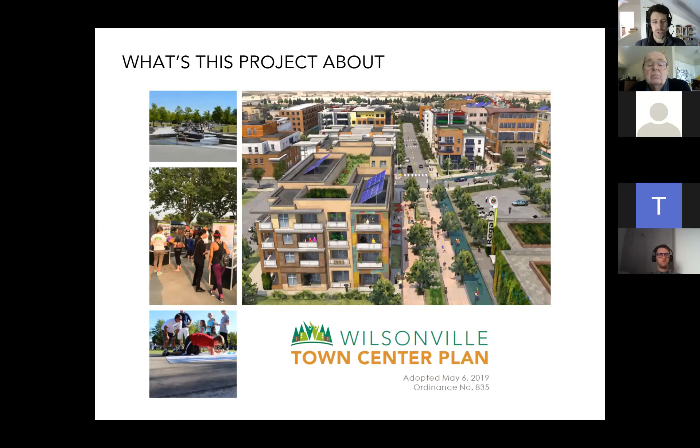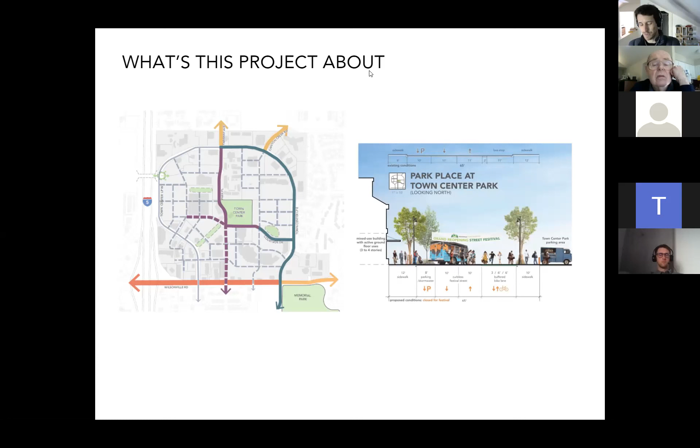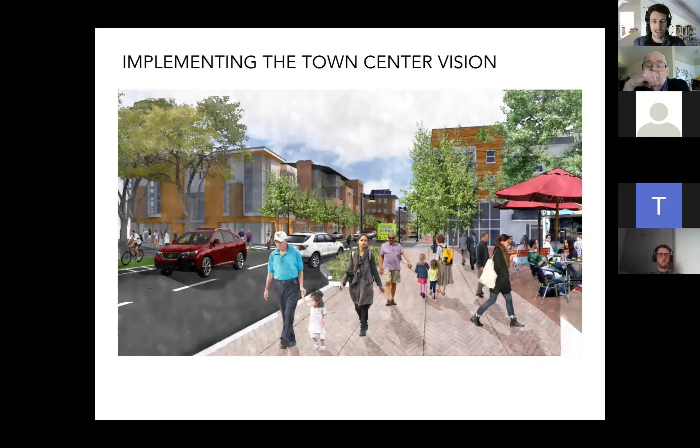This is all with the intention of helping transform town center streets from what they look like today into something that matches this vision, where the streets are more active and safe people places, helping to inspire private development, and really blending between the street space, open spaces, and private site development to create a welcoming, safe, multimodal space with bike lanes and transit for all users.

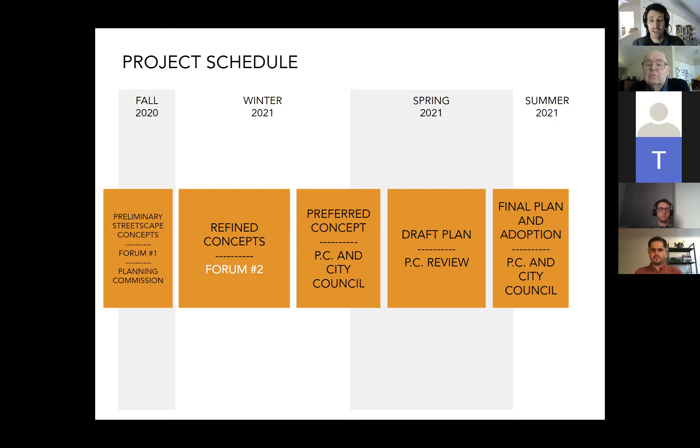Where we are in the process: we kicked this off in roughly October, and had a community forum back in November about project foundations, as well as a planning commission meeting. We're now at the refined concepts stage, so you'll see 3 concepts later on, and we are in forum number 2 right now. Coming out of this, we hope to narrow down to a preferred concept. In early March, we'll go to planning commission to discuss the recommendations for that preferred concept, and probably early April to have a similar conversation with city council. That's to make sure we're essentially getting off on the right foot with the preferred concept, getting confirmation of that, and then transferring into the actual plan writing and specific design work on those 11 locations I mentioned. You'll be able to keep tabs on this project online through Let's Talk and other City of Wilsonville websites and forums in the coming 3 or 4 months.

Just a little bit of that background: again, we're striving to think about streets as places that support vibrant, walkable destinations that inspire people to come together and socialize, shop, live, and work. It's a vision statement from the plan.

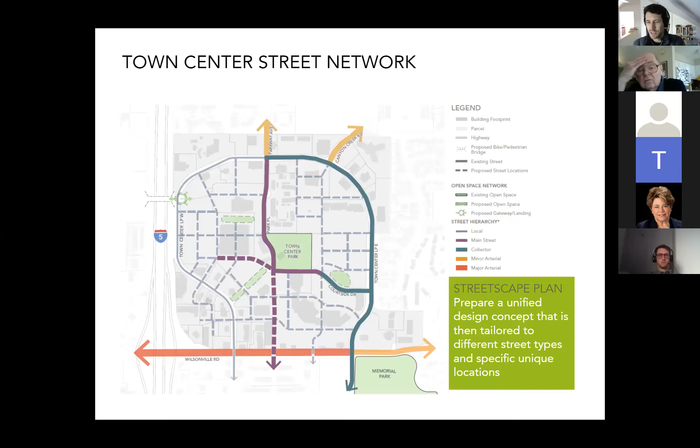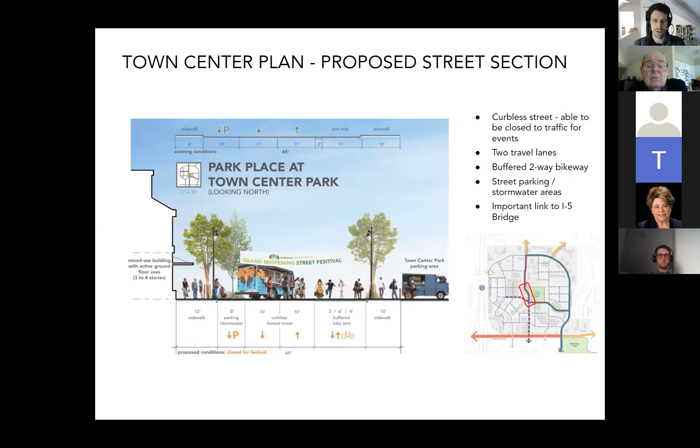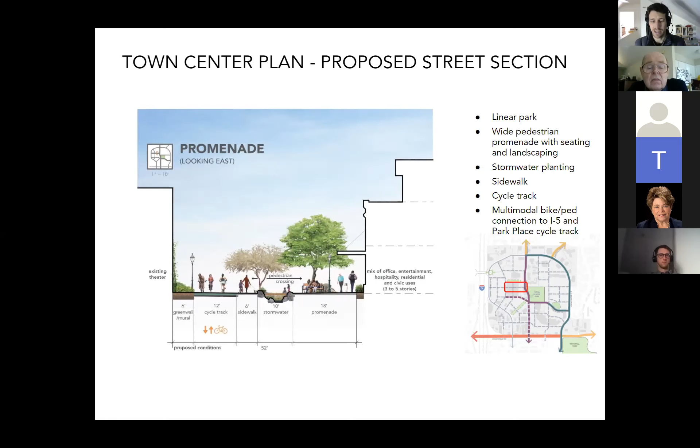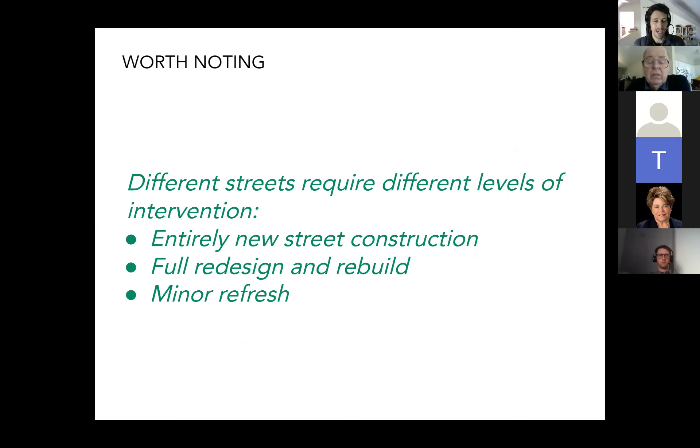Looking again at that streetscape network, we'll blast through that slide real quick. We mentioned that, and these are just examples. You can go find the town center plan and dig into this chapter much more deeply if you want to see it - there's nearly a dozen concept designs in that plan we're taking inspiration from and that we'll take a step further. That's some background homework you can do over the coming couple weeks if we get snowed in. This is just to show the versatility and range of different street concepts out there. We have this curbless festival street, and we have non-vehicle promenades entirely, where in this case a parking lot drive aisle is transformed into a natural promenade with a cycle track and abundant landscaping. The different streets throughout the town center will require very different levels of intervention - some entirely new construction, some a design and rebuild, and some just a minor refresh. We'll get into that in the coming months with those 11 locations.

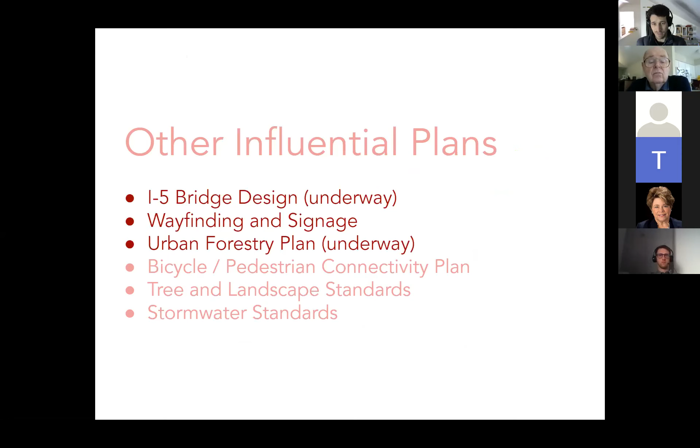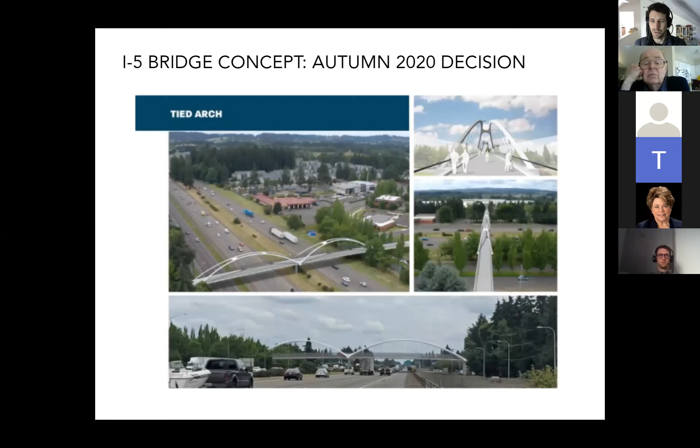We're also tying in with other influential plans like the I-5 bridge design that's underway, the wayfinding and signage plan, and the urban forestry plan. Looking at that I-5 bridge concept, this is certainly a degree more specific than we're getting - this is going to be a construction ready project - but there's a lot of design aesthetics and design of the plaza spaces that we want to be consistent with and ensure that our streets and promenades really tie into.

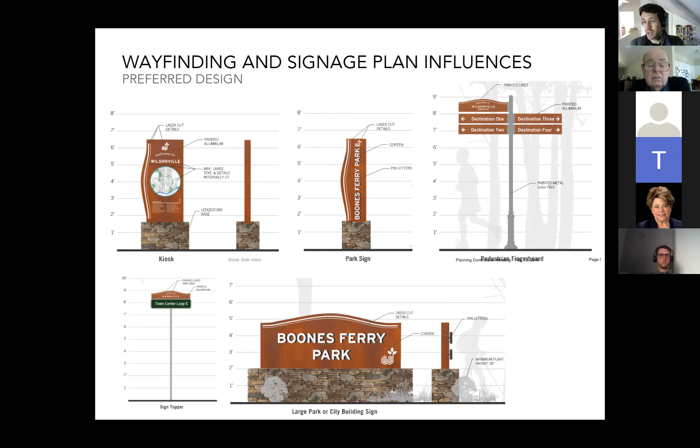The wayfinding and signage plan, which was recently adopted, looks at wayfinding and navigation in the town center and throughout Wilsonville, as well as the aesthetics here. You're seeing the use of metal and stone, for example, and we try to reflect that in a lot of the streetscape concepts we've brought up.

And then the urban forestry management plan - this is also underway and going for the next few months. This will be really influential for helping think about the street trees, landscaping, and stormwater facilities that will permeate throughout Wilsonville and specifically in the town center plan. So we'll be building upon some of this technical work to think about how to take those recommendations and build it into an attractive, safe, and easy enough to maintain streetscape environment.

We also know the town center has some really nice qualities to build upon today: functional but improvable streets, such as Courtside here, with bike lanes and sidewalks, but thinking about ways this could be improved as more of a mixed-use town center, sort of commercial district and activity center.

In your open spaces, you make great use of brick and carved stone to establish your gathering and reflection points. You have a successful transit system running through town and the town center, so we'll be integrating bus shelters, transit stops, and wayfinding for that.

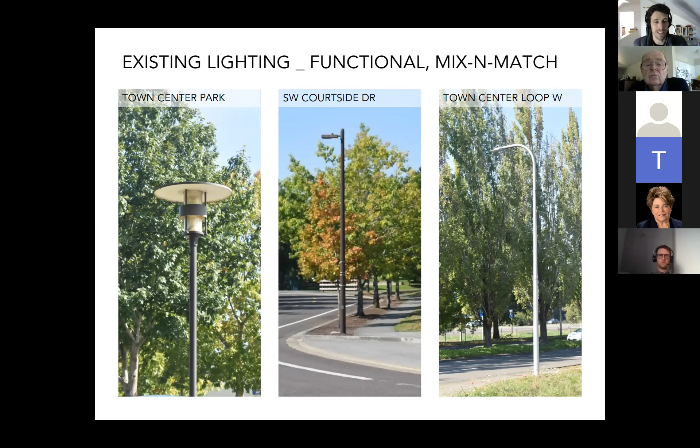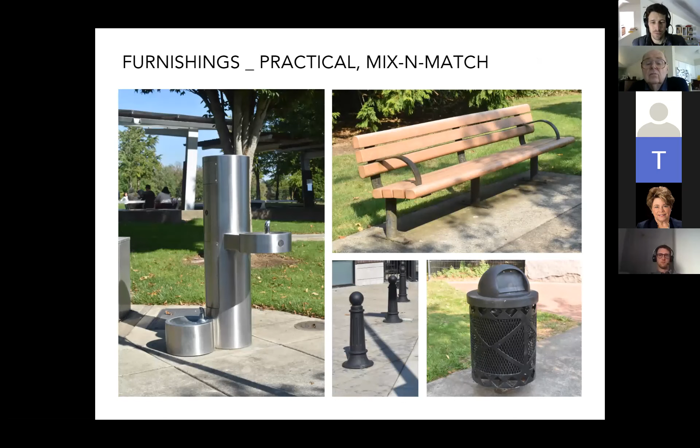Sometimes there's a mix and match of things, at least 3 different street lamp types in the town center. So we want to try to bring some unity to the way that we select these kinds of products, and provide a distinct design aesthetic and consistency for the whole town center. Same thing with furnishings, benches, water fountains, trash cans. We'll be looking at all of those accoutrements that fit into the sidewalk zone.

Feedback we've heard so far again supports that cohesive, unifying town center design, working with wood, stone, glass, brick, and even metal, working with the I-5 bridge design, public art, gathering spaces, and generally a strong support for a modern natural look. So our concepts take 3 different approaches towards that modern natural look.

So I'm going to hand it off here to Colin in just a moment for preliminary streetscape designs, but just keep in mind where we are in the process. So I mentioned those 11 locations. We have some good ideas about where those will be, important streets like Courtside and Park Place, as well as some of the new streets, those gray lines that will be dotted in here.

But Colin, myself, and the team will be selecting these locations over the coming 1 to 2 months. So right now the concepts aren't tied to a specific location in the town center. They're sort of generic, but they're intended to contain all of the features and qualities that you'd want to see in town center streets throughout the entire area.

As we look at the different streets in the future, some are bigger, some are smaller, some support vehicles, some don't, so we'll have to work through those details. But right now we're trying to think through what's kind of the theme of the concept, and then later on in the coming months, we'll specify it to those exact locations.

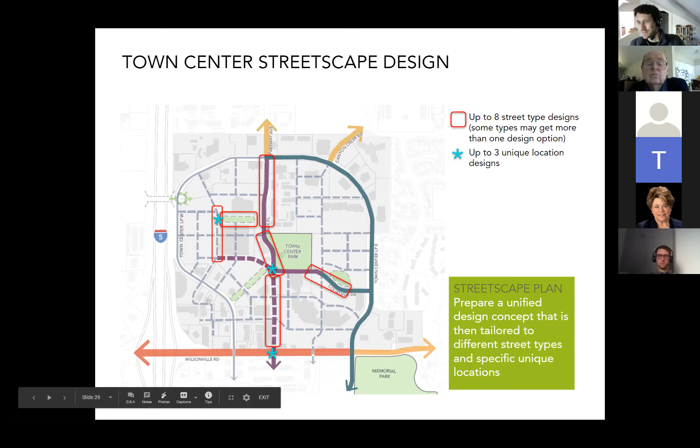Okay, any questions with all that before we get into the concepts? No, okay, hearing none.

Colin, hand it off to you and let me know when to move the slides. Thanks, Ben. Yeah, so we've come up with 3 concepts.

Each one you're going to see have similar materials and similar aesthetics that have been vetted by community members, city council briefly. And it's how we use those materials that's going to differ. Between the concepts, we're trying to tell a different story. Each concept tells a story, but we take a theme and apply that to a streetscape.

So what does that theme look like? All 3 concepts start with this kind of parti diagram, and the first one is agricultural legacy. So we think about what that generally looks like as a concept, and that's what you see in front of you.

And then the next step would be to start thinking about these geometries, applying actual use types and space types to that geometry. So again, thinking high level, but starting to narrow down into that street scale.

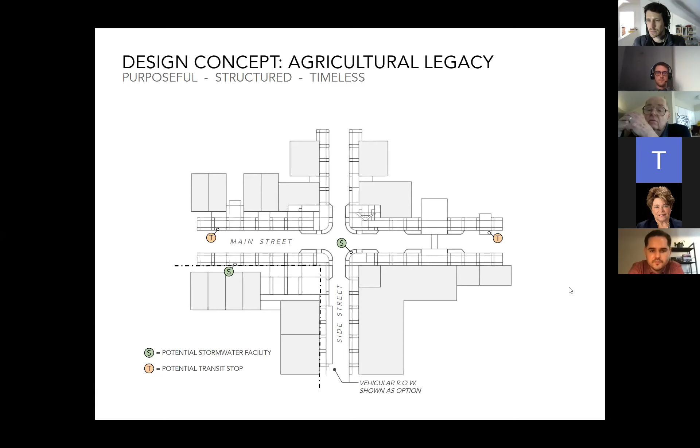Then even more zoomed in, we're starting to look at what these spaces look like in section. For this concept, we like the idea of some actual planters that might represent agricultural hay bales, or those large crates you collect apples in—starting to apply these typologies to actual streetscape elements.

In our first forum we talked a lot about gathering spaces, and we're not averse to inclement weather as Oregonians. So we started talking about covered spaces and how to make streets more useful year round.

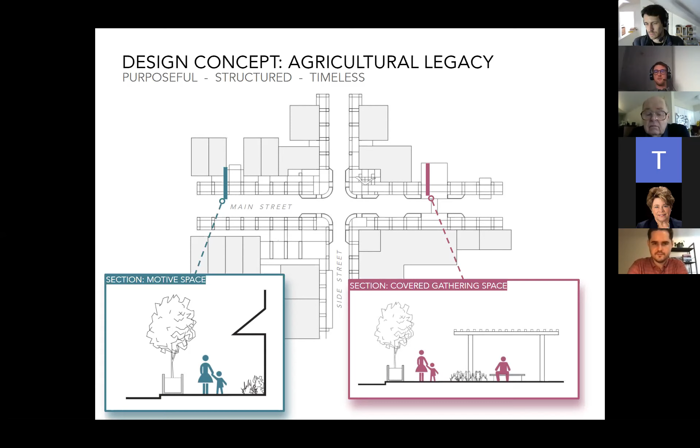When we dive into the specific materials and what these concepts really look like, we start applying photos as examples. These aren't what will actually be in there, but they're starting to show what this really looks like.

Again, what do benches look like? Maybe in this concept, since it's agricultural, purposeful, structured—that organic and purposeful feel. So steel, wood, you see Corten street tree planters there.

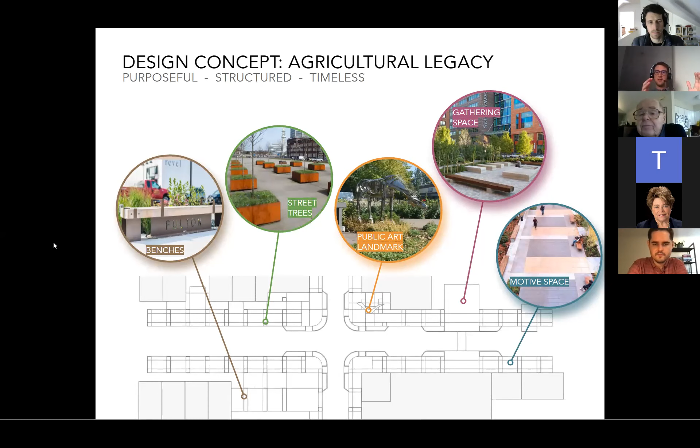Our gathering spaces are very geometric, again responding to agricultural fields. When you think about a satellite image looking down on agricultural fields, you start to see these geometries come to life. Again, motive spaces using filled concrete or colored concrete bands create that idea of applying the high level diagram into something specific.

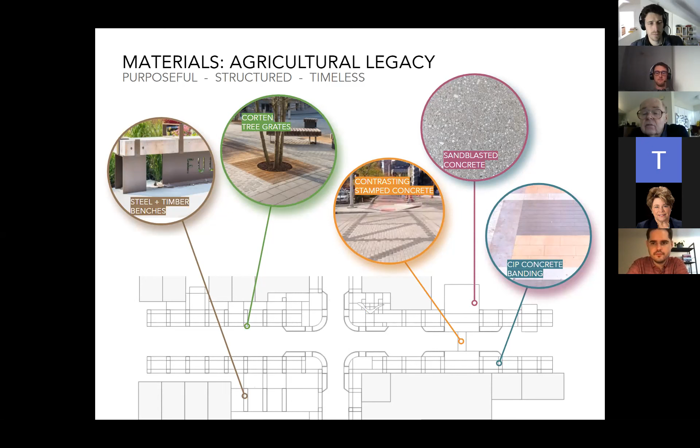More specific about materials, we're looking at steel, timber, Corten tree grates, and stamped concrete, creating a trellis—that was one example of a trellis-like structure. Sandblasted concrete, and again that cast-in-place concrete banding applied to these different areas along the streetscape.

And then we zoom in even further—this is the highest level. When we look at a specific intersection, we talk about crosswalk treatments and plaza features.

ADA paving—everyone's used to seeing a bright yellow ADA paver, but what if that was Corten? And what if your bike racks were an ode to a hitching post? There's a lot of equestrian legacy in Wilsonville and the surrounding area. And with the streetlights, instead of a metal pole, what if we brought in a timber pole with a metal fixture?

Interrupting here, Colin, for a quick question from Todd. Good question, Todd—can we explain what a motive space is?

Sure. When we look at these streetscapes, we're talking about motive spaces versus gathering or passive spaces. Motive would be any place where people are moving through or around as a primary function—not just along the sidewalk, but from the sidewalk to on-street parking, or into a building entrance, park, or plaza. So movement in any number of directions. A pedestrian-only street would be an example, though there would be motive spaces and gathering spaces within it as well.

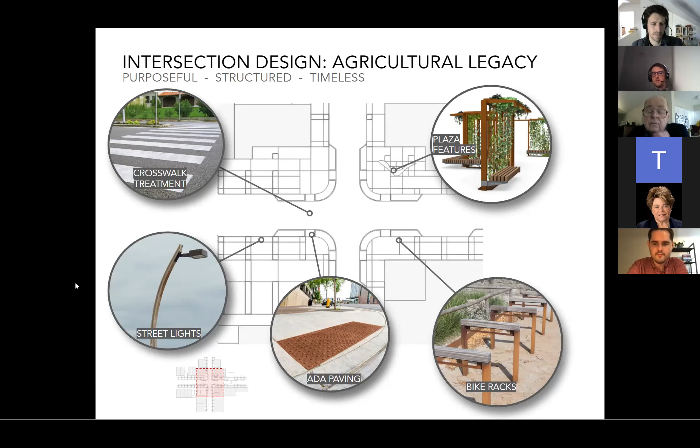So the second concept we came up with was technological innovation—a lot of big tech area history in this region. Starting again at that very high level, what does that form look like? I initially thought of a circuit board and how these modular spaces can be used. How do spaces become adaptable, less prescribed—that was another theme we had thought of. The other design factor would be contrast, high contrast between materials and between spaces.

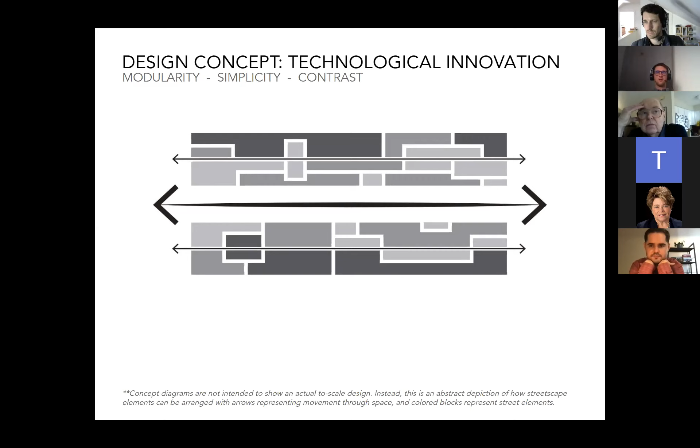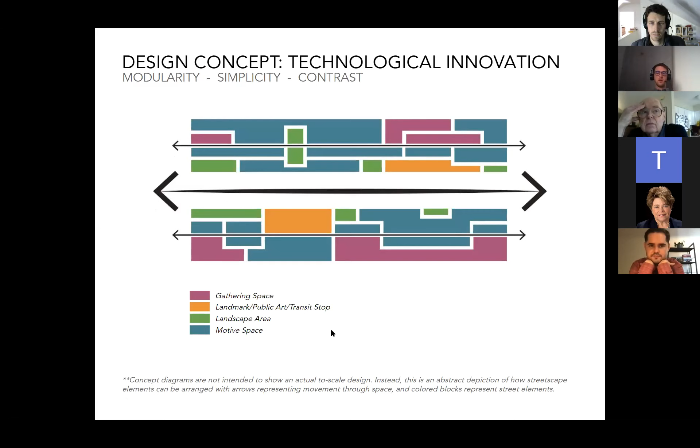Then getting a little more specific—now we have this high level, where do we start applying these spaces? Down to streetscape scale, what do these spaces start to look like, feel like? In this example, these are geometries—maybe I know I want it to be a planter or not, but it's the idea that this could be a planter, a raised planter. These geometries can take on different forms; none of that has been decided. It's simply applying a high level design into a streetscape scale.

This is a good chance to point out we're communicating with Smart Transit about where bus shelters should be located today and in the future, on what exact streets, and how to integrate that into the sidewalk and street zone. We're not getting location specific right now, but we're anticipating that. Same thing with stormwater, as we think about how much capacity we need in the street, and what's on the uphill and downhill side for drainage. Those will be some of the factors that help us think about where to actually locate these facilities.

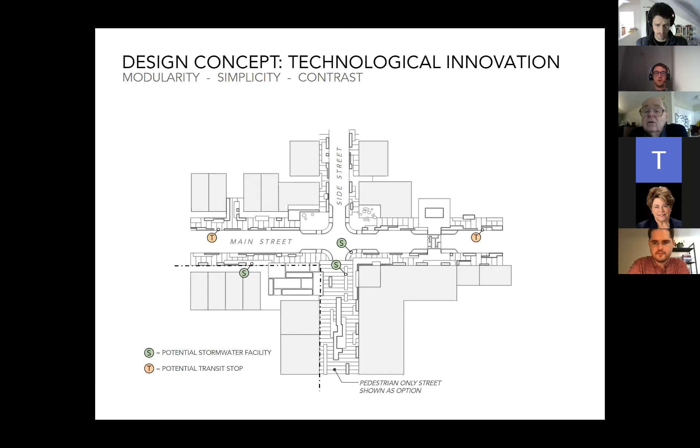Big stormwater facilities might not make sense on some right of ways, whereas pedestrian-only streets might provide an opportunity for a large rain garden type situation.

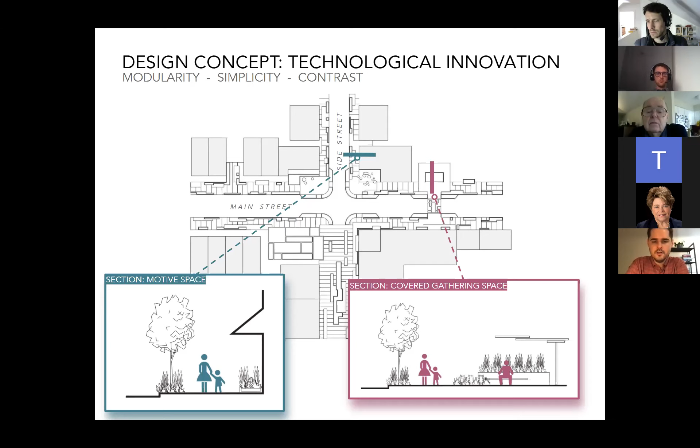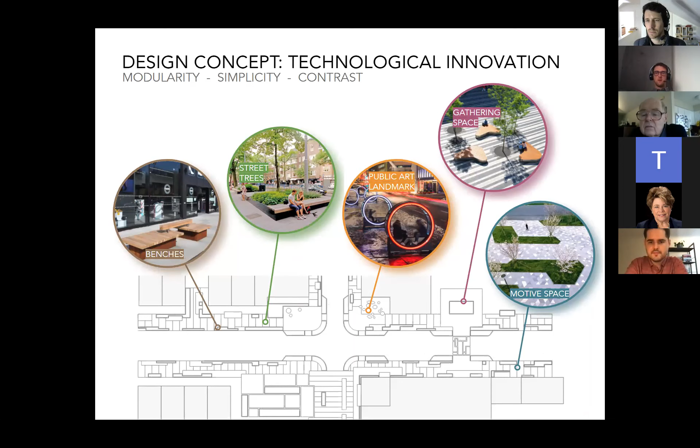Applying those to street features, again similar materials but a slightly different aesthetic, bringing a little more technological innovation and contrast in paving design, or in pavers or concrete benches.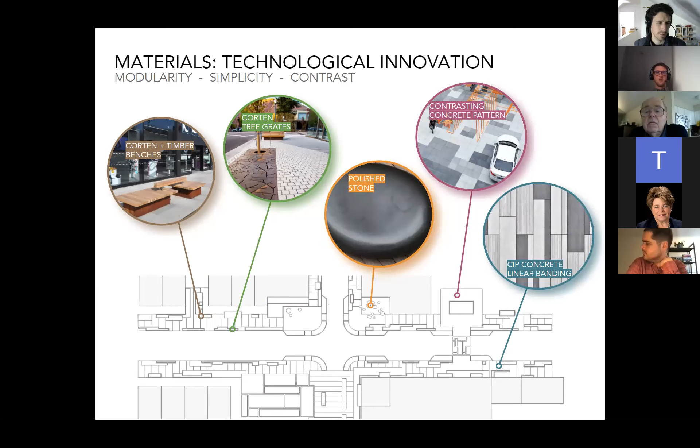Looking at specific materials, you see that same contrast, similar concrete banding but this time in a different pattern that gets to more of that contrast. And then polished stone, which is a contrast to our last concept, but again just different elements dealing with simplicity, modularity, and contrast.

In intersection design, looking at plaza features, you see a lot of linear pavers, linear banding, linear landscape beds. And what if a plaza feature was round, circles in contrast?

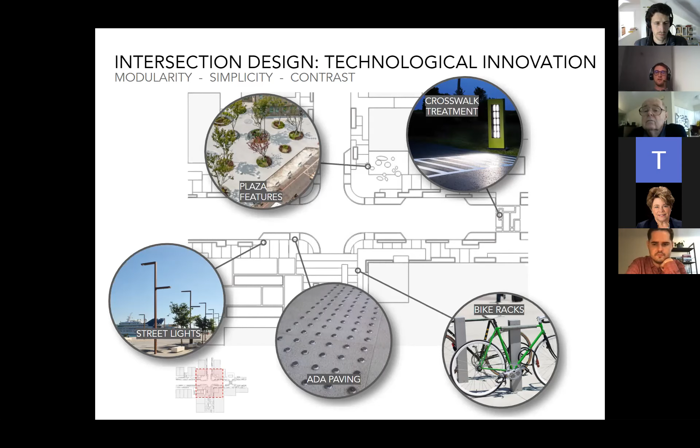Crosswalk treatments start to add lighting instead of just having pavers. The street lights start to look a little more modern and simple, this time all steel, maybe powder-coated steel instead of timber. The ADA paving, instead of Corten, starts to look a little simpler, with cleaner lines in a technological concept. Same with the bike racks, very simple.

Our last concept is our river environment. Living in Wilsonville, we're surrounded by nature, river, and water systems. At a high level, we're thinking about flow and movement through space, which is where these arrows and colors come from in these high-level diagrams.

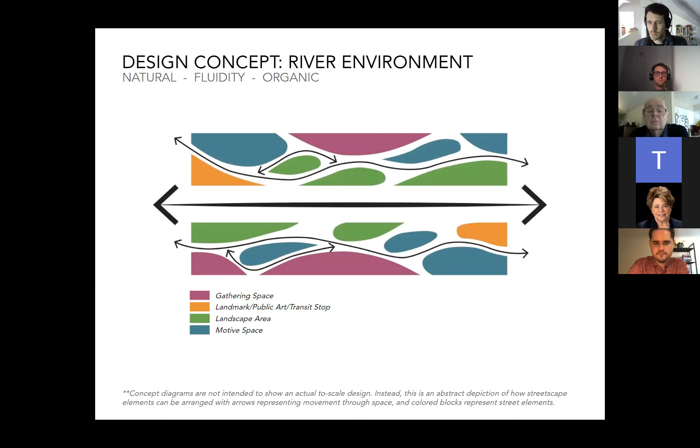Applying that to a street scale, in this example and the previous technology concept, you start to see a pedestrian-only street in the middle bottom. What does that look like and how does it integrate into the streetscape? Applying these forms from the high-level diagram onto a street, we talk about how transit stops and stormwater would look. It's a lot different.

Again, these are just forms and shapes at this point, but eventually when these streets get designed, they'll take on real features, maybe a raised planter, strategically located. For example, in a parking area with on-street parking, you wouldn't want a raised planter right next to it. So this is just starting that idea, zooming in, not quite to construction yet, but applying these high-level concepts.

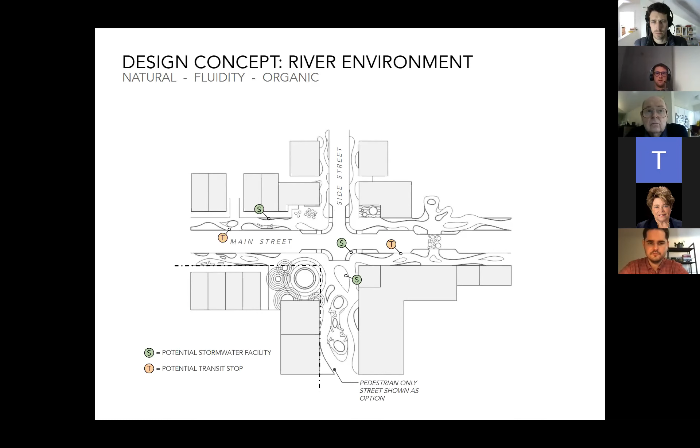Again, motive versus gathering spaces. Now your gathering space, maybe the covered area is a little more organic in form, and the beds are a little more organic in form. You start to see more nature, less hardscape, maybe a little more softscape, keeping with that river environment theme.

Not only are there undulations in the movement patterns, but also maybe movement in raised beds, right? Maybe there's mounding, maybe there's wave forms, undulations in the raised planters. That's what you see in that motive space section on the bottom.

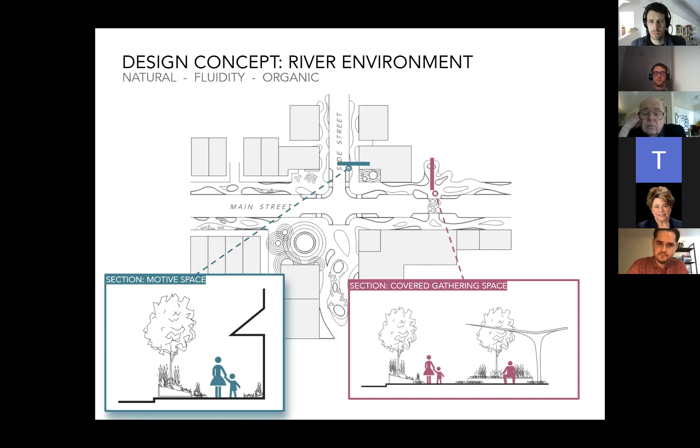Applying those to street elements, definitely more organic forms, less hard lines, more green, integrating lighting into public landmark or public art, and more green spaces, highlighting green spaces.

Gathering spaces are shown in that image as a real river, right? Like we have eddies and flows in a river, so maybe these gathering spaces act as these kinds of eddies for movement through space. And again, in the motive space at the bottom, you're not moving in a linear form, you're kind of flowing, ebbing and flowing.

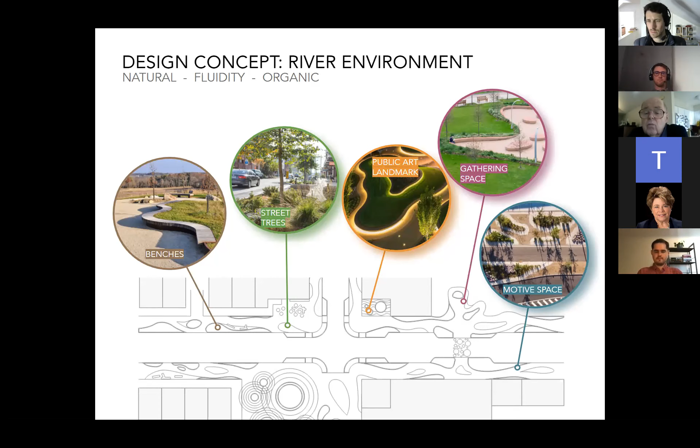We start to talk about specific materials for the river environment, still keeping with wood, timber and stone, but this time maybe a natural stone instead of polished stone. The tree grates have a ring pattern like a water droplet instead of geometric lines. In the concrete banding, instead of linear or large block-like banding, maybe these are more organic in form, wave-like, water-like.

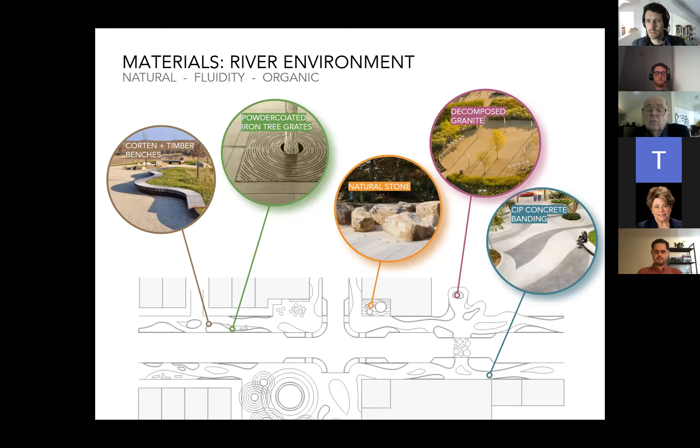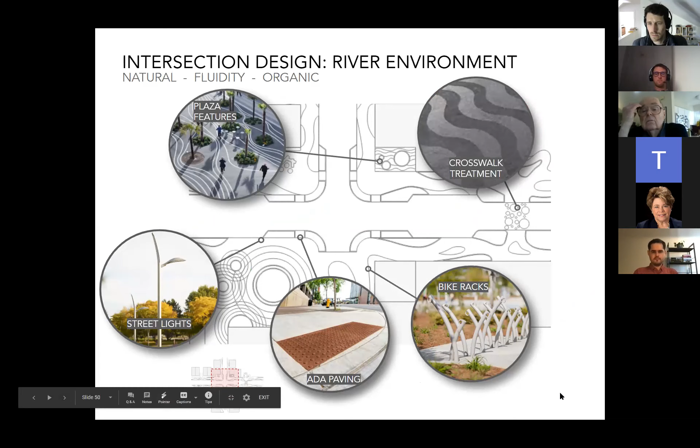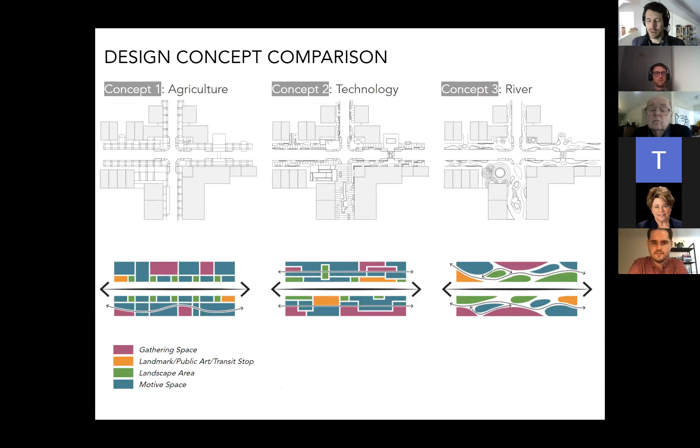And these are all three of our concepts for comparison. We're not going to go through it, but you can dive into the specific designs on top there. If you just look at those high-level designs, you can really see very clearly the main difference in thinking between the three. We'll come back to this slide for Q&A and discussion. It's a good singular image to have on screen while we talk through options. So don't worry, we'll come back to this here momentarily.

So those are the three concepts. We'll ask you a few specific questions here in the chat and in the polling shortly. We also wanted to raise some of the universal themes that we're thinking about across all three of these. When we get to a recommendation in the coming month, we don't assume it's going to be exactly agriculture, exactly technology, or exactly river.

There'll be a blend of features, and that's what we want to ask you about here today. Some of these themes, like a promenade street that can be used for vehicle traffic when needed, but closed for festivities and providing stormwater and landscaping and really unique business access. That's a theme we're keeping in mind.

Here's other examples of those pedestrian-only uses, which is a factor in the town center plan. Stormwater, as we mentioned, will be a big technical thing that we integrate, ensuring that we're working with the Public Works Department to locate stormwater facilities and meet city standards, but also to provide a nice design aesthetic and landscape planting area that really improves the experience and natural environments of the streetscape. That urban forestry management plan will also factor into the stormwater conversations.

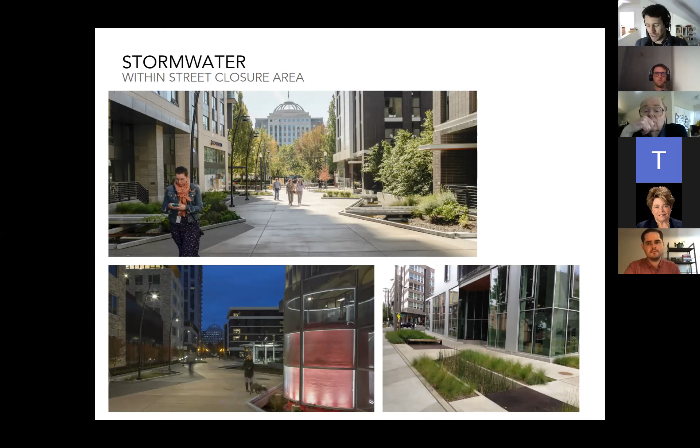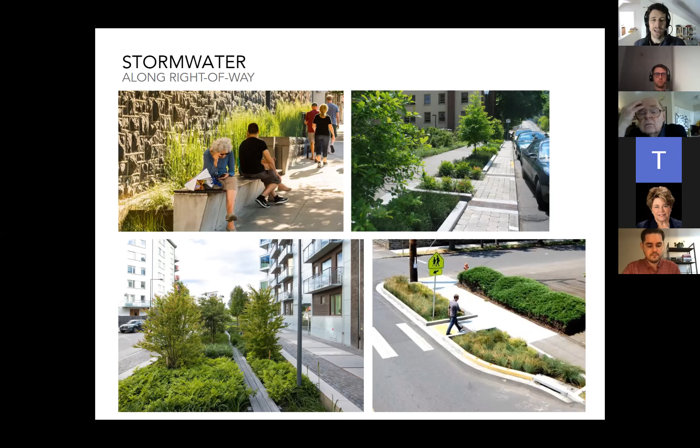Again, stormwater can happen both in the sidewalk zone as curb extensions and near parking, but also near the back of the sidewalk in those plazas and building edges. So there's a lot of opportunity to use it as a way of defining spaces and working through those four different color zones that Colin mentioned.

Again, integrating transit in the streetscapes, creating those bus pull-out environments and waiting areas, shelters when needed, and also anticipating future transit services. It might be smaller vehicles, it might be self-driving buses in a decade or two. So we're trying to think about how to create the streetscape that's future ready.

As I mentioned, in those 11 locations, some of those will be strictly within the street right-of-way, but we're also going to look at a few locations where the public and the private realm blend together, where there's a forecourt plaza. You have a couple examples of this in Wilsonville already that are really successful, where when done properly, you might not even know when you're in the public street versus on the private property, because it's a welcoming gathering environment, business or housing environment that blends between spaces.

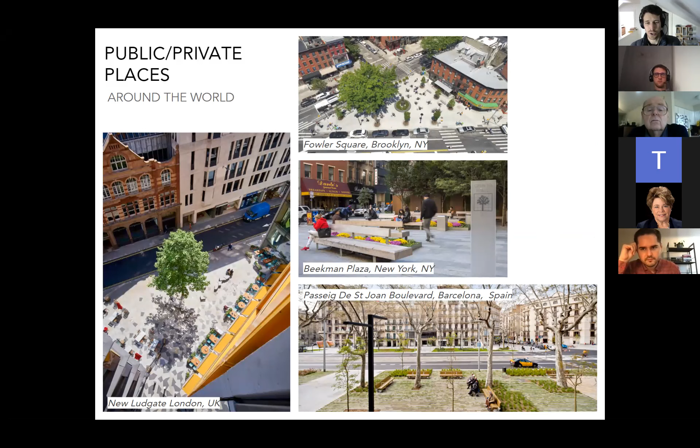Other examples of those, and I should mention, we'll make sure that this slideshow gets posted on the city website here shortly, so you can revisit these examples.

So we're actually going to start a few questions here at this point. And Ben, before we do, I do see that we have a couple of questions in the chat. Yeah, maybe before we move on, we can answer those. And I can take one of them if you want to take the first one.

Courtney asks, how do these crosswalk treatments comply with federal traffic control, MUTCD, the manual on uniform traffic control device requirements? Yeah, we're definitely working with Public Works to ensure MUTCD compliance and Americans with Disabilities Act compliance. So there are standards that we're ensuring to work with. And then there's also an exemption or exception process where if we want to put forth a crosswalk or a curb extension that's a unique design, if we can prove that it's still MUTCD compliant for traffic control and safety and disability access, we can consider that as well. So that's a question we haven't made an absolute decision about. Do we want to comply with basic standards or seek a unique solution, but that would still meet all those requirements?

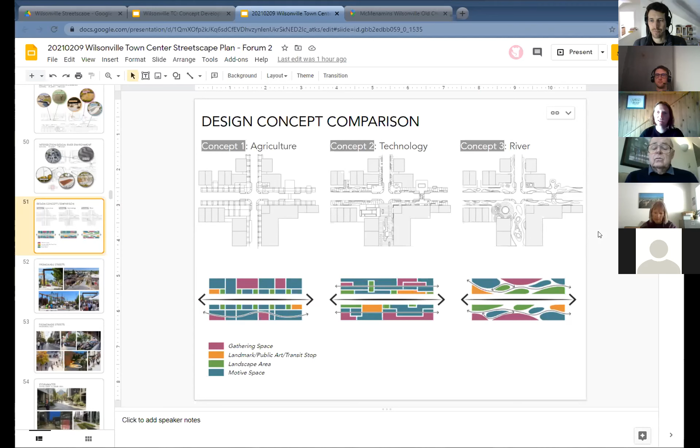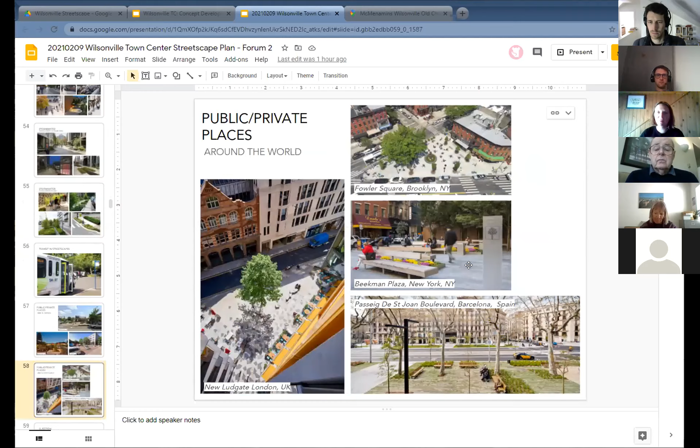Sure, I could take that one. A lot of it is going to depend on who is constructing the improvements. If it's a frontage improvement associated with private development, typically the cost to construct the facility is undertaken by the developer. So things like a frontage improvement, a sidewalk, street trees - those are typically things that private development pays for. As it relates to some of the infrastructure projects currently in the town center plan, like if we're looking at a whole section of a street, that is something we'll be looking towards as we develop a finance plan for the town center itself.

That is one of the town center plan's implementation projects. Within the next year or so, we're going to start that project up and start looking at costs of some of these. We have some preliminary cost numbers in terms of the improvements that are planned, but looking at what financing mechanisms the city would use, knowing that there is a component of private development that pays for some of the improvements, but there is a public component and share to some of those as well.

Yeah, all right, great question. Okay, I want to put another one back to you. So feel free to speak out or type in the chat window. Which elements—gathering space, movement areas, landscape, plazas, or public art of a streetscape—are most important to your enjoyment of a streetscape? And do you see those qualities in these concepts?

Give everyone a minute to type in responses if you have them, or feel free to raise your hand and speak up.

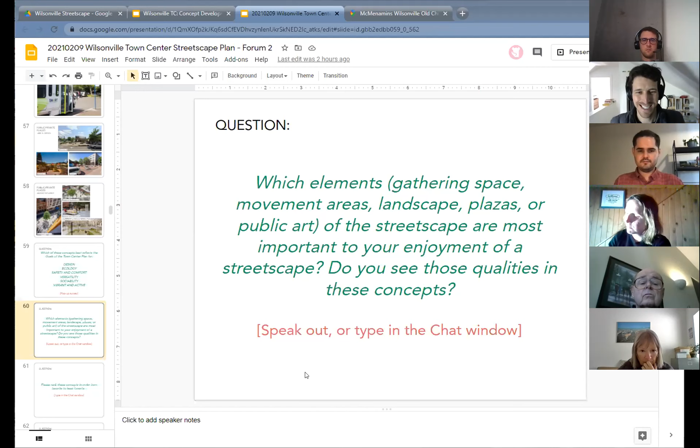All right, with only a few minutes to go here, I'm going to pose a few more questions to you all, but we can kind of consider this a freewheeling moment of the forum. Go one more down here. First, if everyone in the chat could just type out your rankings of these from favorite to least favorite. We just want to get a straw poll on that, or feel free to say it out loud.

So that's one assignment. As we're coming to a close here, I just want to gather any final input, anything we haven't asked you about, or specific things you like or dislike about any of these concepts, and if you have strong positive or negative opinions about any of them. Feel free to speak those out loud or put those in the chat too.

Okay, being lazy on typing, I go for technology, then river, and then agriculture. All right, it's written in my notebook here, so part of the official record.

All right, Susan, Catalina, you've put in some rankings. So as we close, is there anything else you all want to bring up or that you think we on this design team should know or really take into better consideration? I saw the chat comment that we really need to pay attention to the current business owners that are in town center. So I would want to make sure that they have a voice in any of the decisions, especially if they'll be the ones who have to pick up quite a bit of the cost.